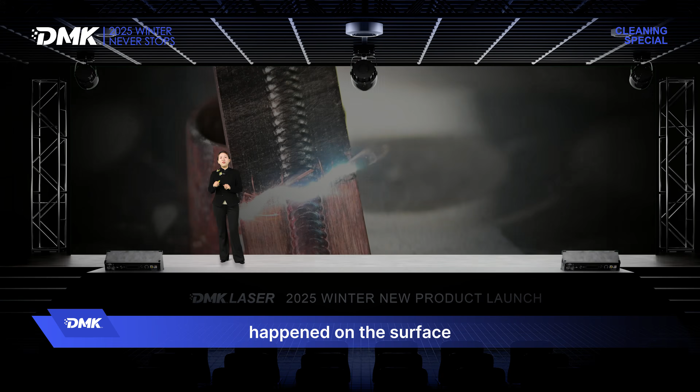This year, this feature has brought us many professional customers, some agents who were selling welding tools. They bought these cleaners as a professional dedicated cleaner before and after welding.

We also have other evolutions, like cleaning on carbon fiber surfaces, which is a new application scenario and very critical to do with laser, because you have to be really precise on the cleaning layers. This application has been used in the shipyard industry and proved useful and practical in the shipyard cleaning process.

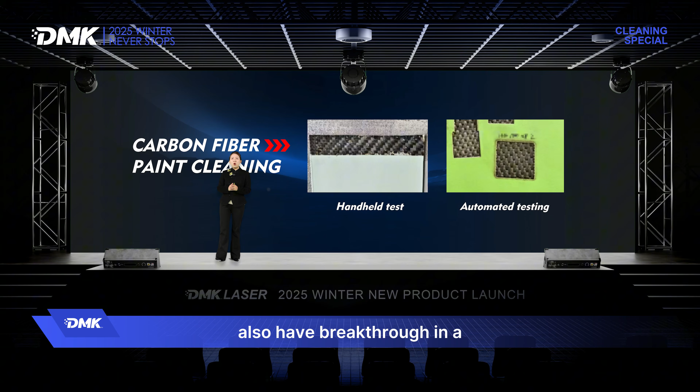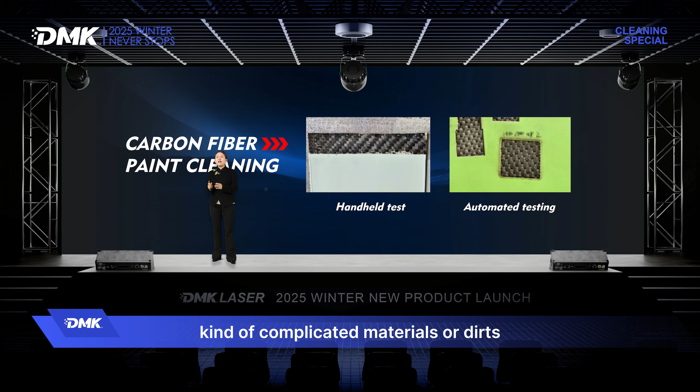In application terms, we also have breakthroughs in composite materials or high reflective materials, expanding the application scenarios to many kinds of complicated materials or dirt that you want to clean with laser.

We also gave very intense customer care to our global customer groups. As a typical example near the end of the year, we got a very close partnership with a German agent who imports really high quality machines from China.

After setting up the cooperation with us, we have supplied the dedicated laser cleaner for the welding process, to make the welding seam really clean before and after the weld.

Every technology actually comes from the real needs or pains of the customers. This is what DMK Laser always focuses on. No matter how you design or think about new products, you must listen to the voice of the customers, which leads to real useful and practical tools for the next version. That's what we mainly focus on this year.

We welcomed many visitors. Our operators competed with them on cleaning with different machines, different sets of parameters, and different materials. We learned from them, from our customers in China, and also from our competitors and their new products. It's always learning from the market and from customers, which resulted in the new products we're going to launch today.

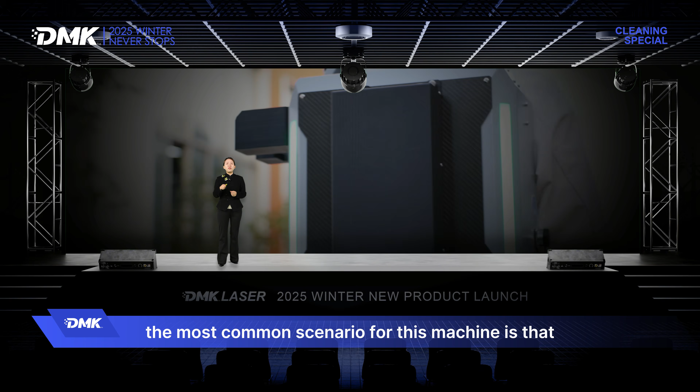I think the most common scenario for this machine is when you need to climb up really high, or go to remote areas without any electricity input. People often inquire about this model, but I'm not sure in the end how widely it will be used.

But because it's a backpack, we're going to make it even lighter and more fashionable. This is the new look I really like. The current look of the backpack is made of sheet metal, so it still weighs a bit more and isn't so fancy. Our operations manager promised me he will make the new look in the next quarter, so look forward to our next new product launch conference - we're going to show you this new fancy look and it will be a lot lighter.

And this one I like - the extra long armored optical cable. With the old version of GT500, customers were always asking about cable packing, because the machine is so small and compact. If you order a 5 meter or even 8 meter long cable, it's hard to circulate it on the side of the machine. With this trailer style, we have a place - a holder for the cleaning gun - and with 8 meters or even the longest 10 meters, you can pack it very well, which I think is a very shiny new feature.

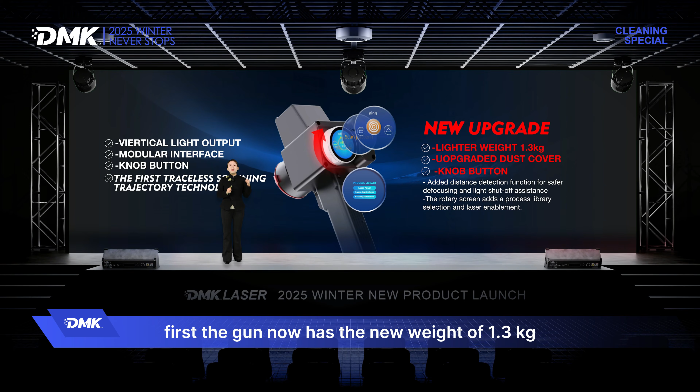Second comes the new features of the cleaning gun upgrade. First, the gun now weighs only 1.3 kilograms, down from 1.5 kilograms last year, so it's become even smaller.

We also upgraded the dust cover. When you finish using the machine, the dust cover will close. Next time you open the machine, before you shoot the laser, the cover needs to be in the right position - there's a sensor for that. This avoids operators who didn't open the cover and burned it with the laser.

And the emergency button on the cleaning gun, which is a must-have safety feature for European customers. I think it's also very useful for everybody - if you have a sudden situation, you just press it down and the machine will stop.

Then from the look of the machine and the cleaning gun, we come to the control system. The machine is made of these three main parts, so all the upgrades to the control system try to make this tool more useful and easier for all operators to use.

These are features we launched last year, but for some new people who probably just came to this conference, here's a little understanding: the touch screen and intelligent control system, fully developed by our own team, now support 14 languages instead of 7, and offer a simplified cleaning mode.

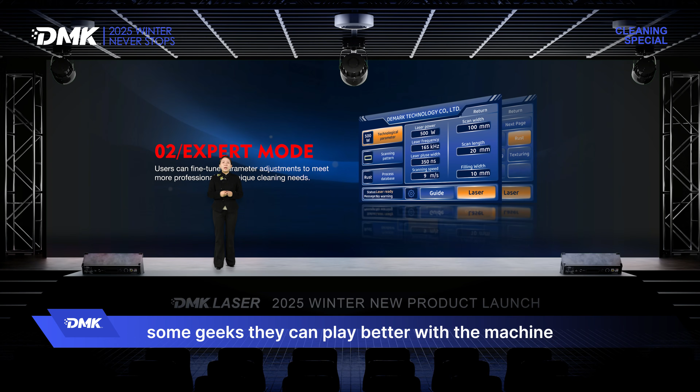Our last version of products only had one mode of cleaning parameters, but some customers didn't want their operators pressing many kinds of buttons on the screen. So now we have an expert mode and a simplified mode. For new operators, they can use simplified mode which tells them which pattern, power, or parameters to choose. For the expert mode, some geeks can play better with the machine to achieve more complicated results. So this is the expert mode.

You can see all the parameters, you can play more with the pulse width, the scan length, and many other parameters.

We especially added an after-sales interface, because all the machines delivered to other countries—if you come through some failures or issues, you can come to this service mode. You show the parameters and our engineer will help you solve it online.

We also have many new functions in our parameter preset function, the database, the cleaning library, the parameters library. I think this is something very special and very advanced, leading in the industry by DMK Laser, because we are probably the earliest one to offer this cleaning parameters library. I don't know if we're the most complete one, but we're the first to bring this to the market, and we keep enriching the parameters to make it easier for new users. When you receive our machine, you know where to start.

You don't need to watch all my courses on YouTube or read many articles and professional manuals. You can easily choose parameters according to the parameter library. So these are the functions that we have from last year.

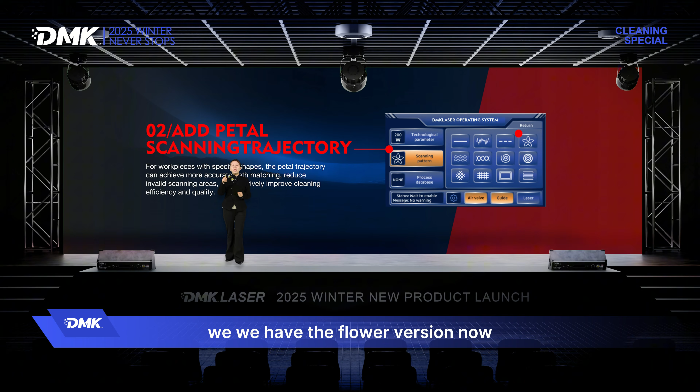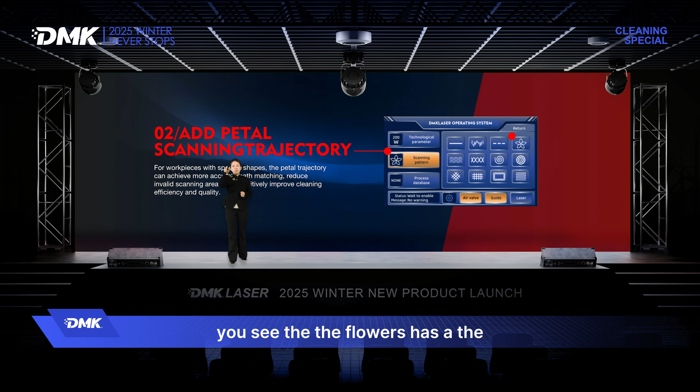We have the flower version now. I think many people were asking for this flower, and we didn't want to have it at first because of the flowers other people bring to the market. You see, the flowers have an intersection in the center, where every leaf crosses there. This means when you play the flower pattern on the surface, it's always overburned in the center because the laser passes there many times. So when we came up with this flower, why did we add it?

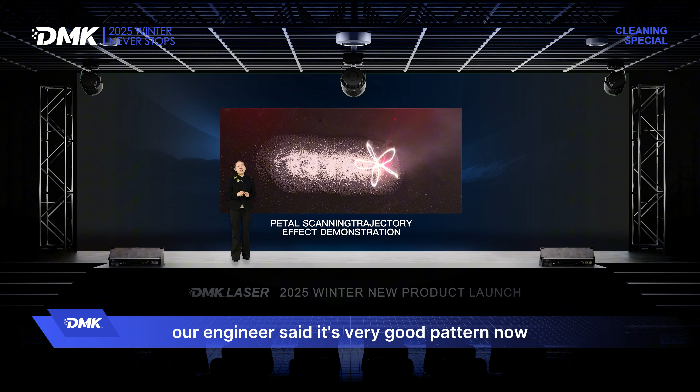Because in the end, the flower shape is very suitable for some round things or uneven, unflat profile surfaces. So with this flower, we had the upgraded algorithm, so we don't let the laser pass there many times, to get very equal, very good cleaning surface with this pattern. Now I think it has become one of our pattern family, and our engineers say it's a very good pattern now. We also have a new scan pattern.

We will suggest that for different shapes or different materials, you choose different patterns. We also heard from our customers that they would like this new feature, including the preview of the patterns. In the past, when you chose a pattern, you saw it only from the sheet of all the patterns, but now during operation, you can also see which pattern you've chosen and how it moves during the operation. Our engineers believe maybe it's not very useful, but customers really want it, so now we have this.

We also have a library upgrade, which I think came from our customer needs. When you choose rust removal or texturing, sometimes the rust is small and thin, and sometimes it's deep rust, so you probably need different sets of parameters. So for these two functions, you can choose the mild way of rust removal, or the regular, or the deep.

For texturing it's the same—sometimes you need very deep texturing, sometimes just mild. This makes it even easier for people. You don't need to play between all the parameters, you can just, with a simple click, get what you want. These two are the most common applications, and this is how light, regular, and deep look like in the rust removal or texturing process.

We also have an independent air valve button, so before you shut off the machine or disconnect the air supply, you won't be shocked. You can simply close the air valve before taking the pipe away, so there's no air left, and you can easily remove the air supply.

We also optimized the pop-up notice. Sometimes for warnings, especially when you're not operating the machine the right way, the system will give you a warning pop-up on the screen. This is very easy and prompt, so you don't go further with mis-operations on the machine.

We also have safe laser operation—if you don't have the gas inlet, or if you don't have the right parameters, the system will give you a notice that the laser will not be operated.

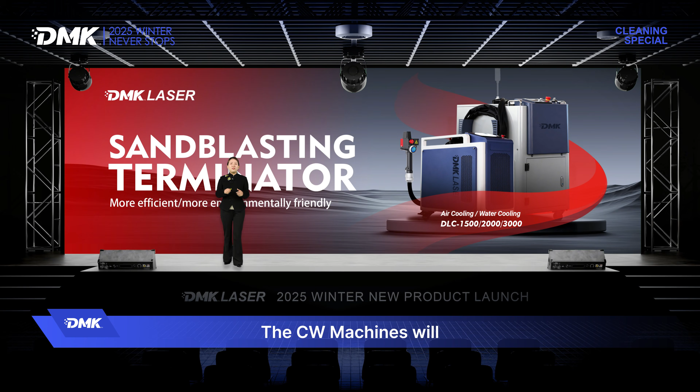We believe that CW machines will eventually terminate sandblasting. Maybe it's not friendly or happy for sandblasting people or machine makers to hear this, but we really see the trend—CW machines will replace or maybe terminate sandblasting someday.

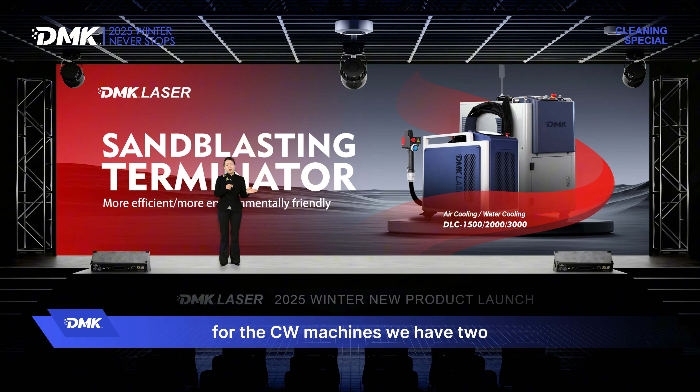For the CW machines, we have two configurations. One is air cooling, which is very small, without a water chiller. Power can go up to 2 kilowatts.

We also have the water cooling style, which is now the best seller in this field, because people want high power for CW cleaning—you need really high power for faster speed and to take off thick rust on big parts. So people usually choose 2 or 3 kilowatt, which is why water cooling sells more.

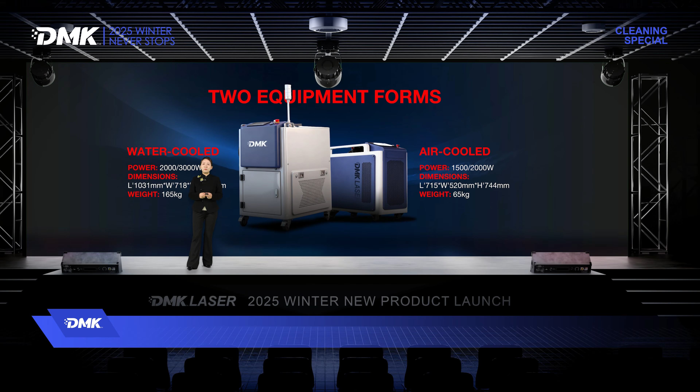But I think when air cooling power goes up to 2 kilowatts, this sales trend will shift a bit toward air cooling, because the machine is smaller without water cooling and much more mobile. But we would not recommend the 3 kilowatt machine, because the power is too high for the cleaning gun, causing more failures with the protective windows or the gun itself.

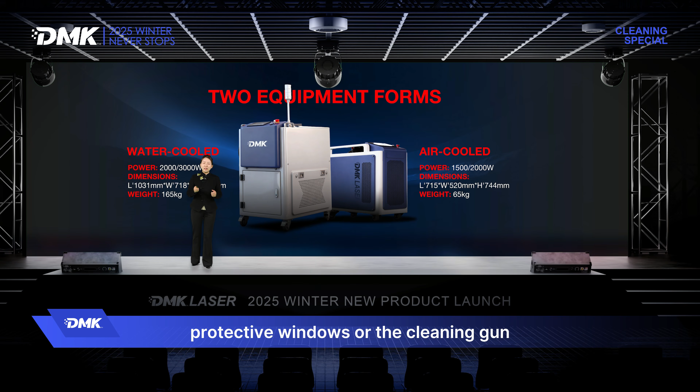For the CW machine, we have two very important innovation technologies. First is performance. In the beginning, I think it was a very simple machine, more like a welding machine—you put the laser there, connect a cleaning gun and a chiller, and that's the machine.

But as time went on, we customized the beam shapes with a small core diameter fiber, and developed our own laser cleaning gun instead of using the commercial cleaning gun on the market. Now we have two main applications.

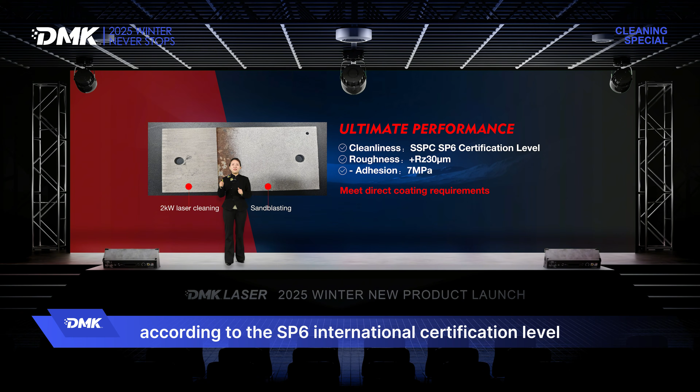The first is texturing before painting. With the CW machine's customized laser and beam path, this is the 2 kilowatt laser cleaning we've done on metal compared with sandblasting. We achieved cleaning according to the SP6 international certification level—we get a really clean surface, shiny and white, with roughness 30 microns more than the original surface.

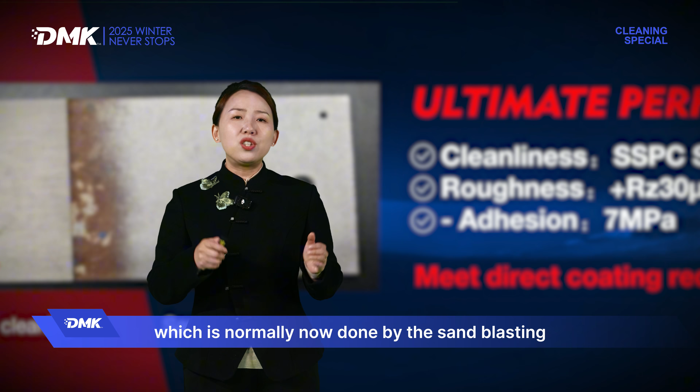For texturing, the standard is that you need a really clean surface and the right roughness, so you get paint adhesion up to 7 MPa. These are the results we tested with samples, giving you better painting—what we call real texturing, which is normally done by sandblasting.

But sandblasting, while fast, requires protecting the whole area because all the sand goes everywhere, and the sand is also consumable. That's why a lot of sandblasting procedures are now shifting to laser cleaning with the CW laser.

Second is the upgraded laser head, which I've talked about before. For the CW laser cleaning gun—if you're familiar with CW cleaning over the past 3 years...

All suppliers and manufacturers have suffered from a very high failure rate of the cleaning head, especially for 3 kilowatt. For 1.5 and 2 kilowatt it was okay.

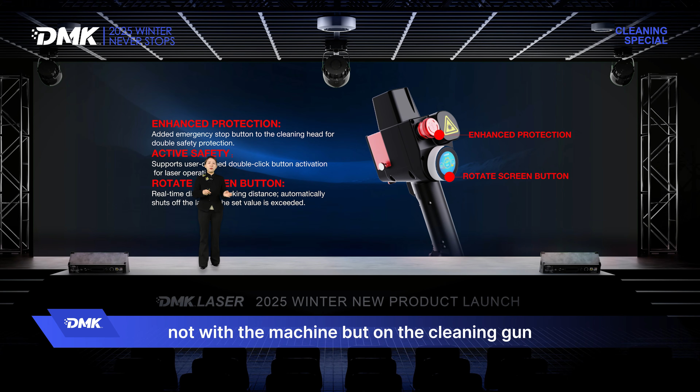But now with our own cleaning gun, the weight is 1.8 kilograms, with almost the same safety features as our pulse laser cleaning gun: the emergency stop, a small screen to adjust parameters right on the cleaning gun instead of the machine, and the defocus function that keeps it safe.

If the laser works out of focus with the material, it will shut off automatically. And most importantly, it's very stable—we have two air protection flows in the cleaning gun to protect the protective window, because CW laser work happens in a very dusty, dirty environment.

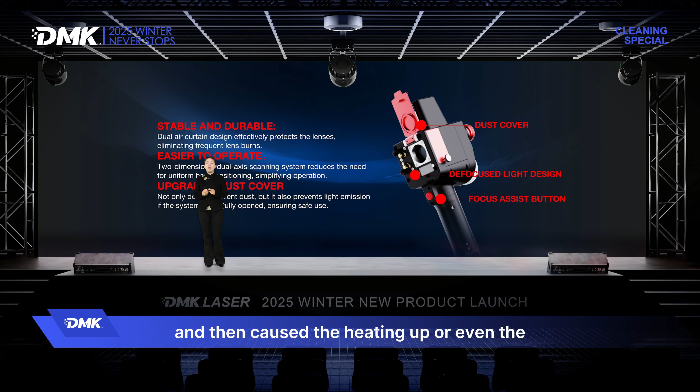So all the failures came from dust getting back into the beam path, causing heating, or even explosion or burning of the lenses and optics.

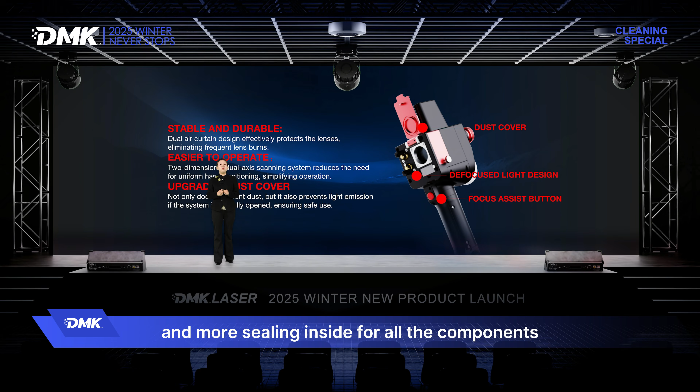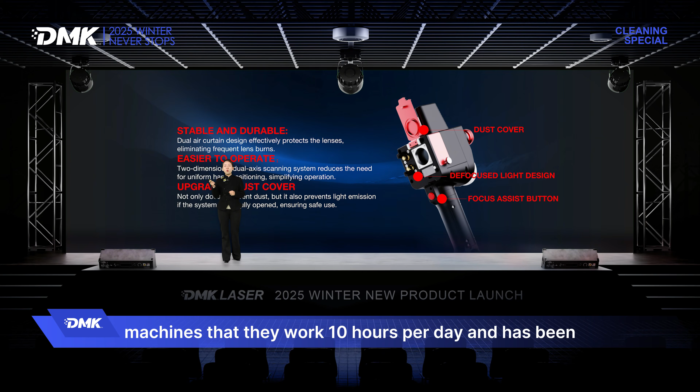So what we've done is we added more air curtains to protect it, and more sealing inside for all the components, to make it more stable. Even with the small core diameter of the laser, which means higher density to the lens, we have machines that work 10 hours per day in factories for 3 to 5 months, really tested in industrial applications. It's more durable and easy to operate. Also, the new design of our cleaning gun is good looking, I have to say — the color, the shape, it's industrial but also good looking.

And in the future we can expect, this is the air cooling CW laser cleaner, and our operation manager promised me he will upgrade to this looking, and I'm really looking forward to it. I hope that in 3 months or maximum 5 months, I can honorably have the new launch of this fancy product with the backpack we mentioned.

The control system upgrade is almost the same, because no matter if it's our pulse laser cleaning gun or CW laser cleaning gun, we use the same control system with 2D, 2 scanners. So all the patterns, all the ways, and all the applications inside are the same upgraded. It's similar, so I don't want to repeat it here. So this is the summary for the whole Pulse and CW laser cleaners: performance, upgraded cleaning head, upgraded system.

So besides these new features, what else can we provide for all of our customers? I mean, besides the new cleaning gun, the new patterns, the new lookings, the new wheels — besides all this, what more can we do for you? I think it's about what we're thinking for you.

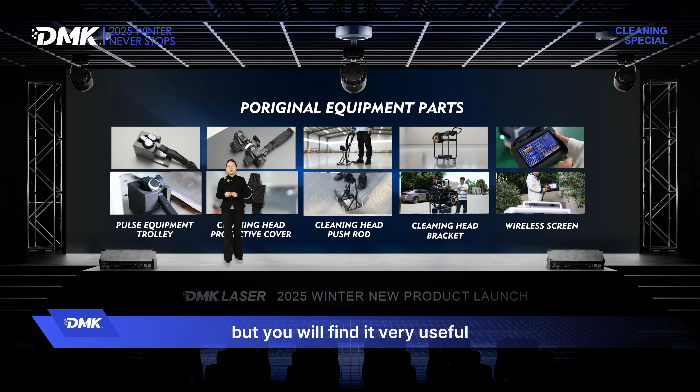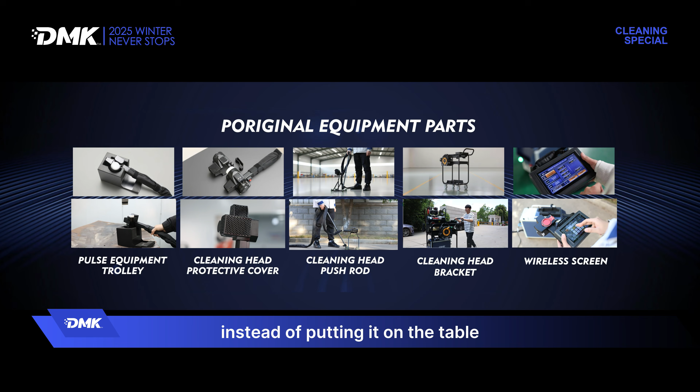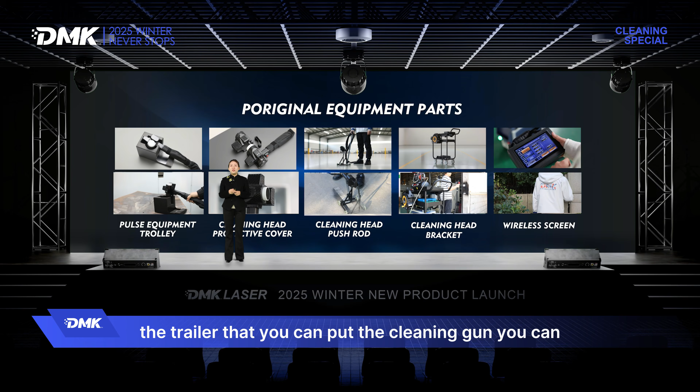It came from all the voices from our customers, and we provide value-added services, including these options, which look like very small things, but you will find them very useful. This also came from customer suggestions, the voice of hundreds, thousands of our customers — like during your cleaning, you have to place your cleaning gun on a box instead of putting it on the table and maybe having it fall to the ground. And a protection cover, so when you have a collision with the gun, you don't break it. And the wheels, so when you're working on a large surface or space, you're hands-free. And the trolley, so you can put the cleaning gun and pack everything on the table.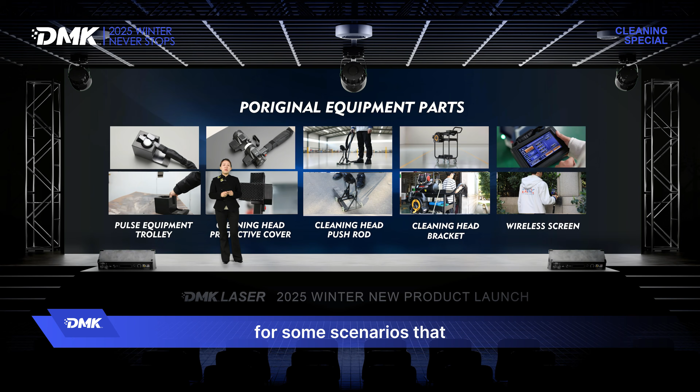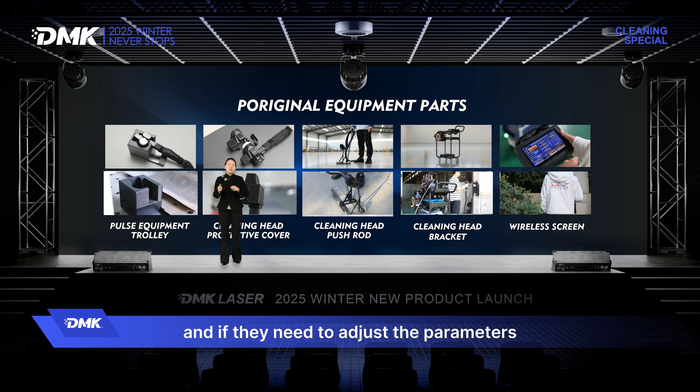Also the wireless remote control, for scenarios where some customers doing cleaning service put the machine in one place, fix the cleaning gun, and move the workpiece. If they need to adjust the parameters, they can use this wireless remote control. So these are all the functions, the options, and they look very small, but I think the most warm or sweet upgrades come from these small details that show you really think about your customers.

And for protection, as I've talked about before, there's a pop-up notice for precautions and protection if you make a wrong operation.

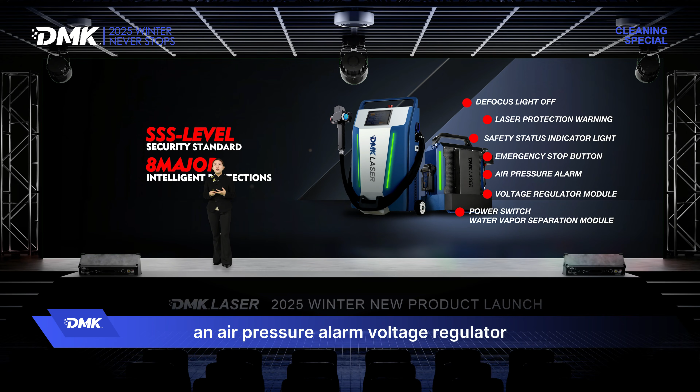For safety, I think there are some new features for our brand products. The safety we've done with all of our machines is very high level. I don't know how to name or certify it, but there are mainly 8 major functions: defocus light off, protection warning, safety status indication light, emergency button, air pressure alarm, voltage regulator, and power switch. We've sold many machines to Europe, including Germany, France, and Italy — they have very high standards for safety requirements, and we have happy customers globally.

We also have strict quality tests before delivery, and we have babysitting after-sales service. I think our after-sales service is what I've always said — DMK Laser products have a slightly higher price, I have to say, slightly higher compared with similar products you'll find from the China market. But I always think that when we're delivering a machine, a solution, the partnership only starts when you purchase — it doesn't end there. So what we concern ourselves with is really good delivery, good quality, and good service.

So for industrial products, in any case, you will probably face these requirements for service. We have 2 groups of service engineers, for pulse laser cleaners and for CW laser cleaners. We work until late night in China, and we reply to every requirement or question online. We also make videos of many frequently occurring failures, to instruct how to handle them or how to switch components by yourself.